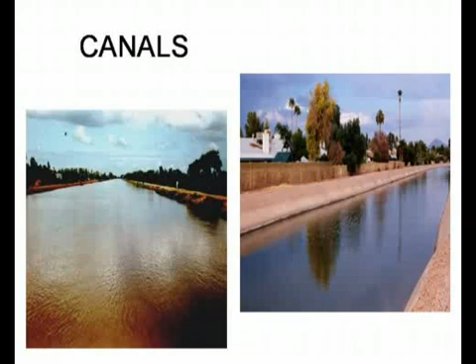Canals are man-made channels which carry water diverted from natural rivers. We use river water and transfer it to areas where there is no natural flow of water. Before diverting this water from rivers, we need to store it, and this water is stored in the form of dams, weirs, barrages, which are called diversion structures.

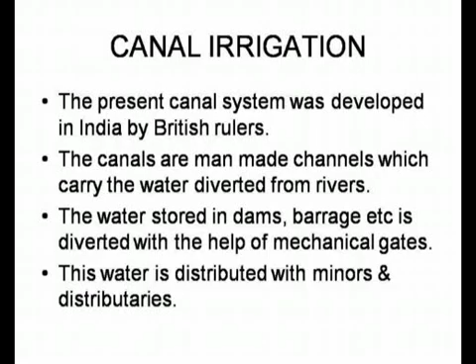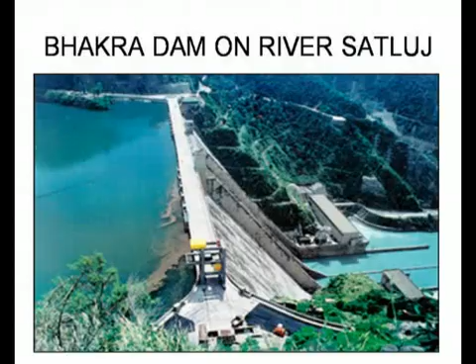There are mechanical gates which regulate the flow of water in canals. They can increase or decrease the flow depending on requirement, season, and cropping pattern. The water is further distributed from a canal by minors and distributaries, and the control of this water is with the local government, which decides how much water is distributed to which area. Therefore, canal water is a centralized form of irrigation controlled by government.

The canal water has certain advantages. First is quality of water. The water in canals comes from rivers, and rivers take their water from melting ice in Himalayan areas, or from catchment areas or big lakes. This water is sweet, non-polluted, and best for agriculture or human consumption.

The canals have transformed the agriculture economy of northern India, western India, and other parts where canals were built by the British and later by government. We all know that the Indira Gandhi Canal, which passes through Rajasthan, has transformed the life of people there, and it is the lifeline of millions of people living in that region.

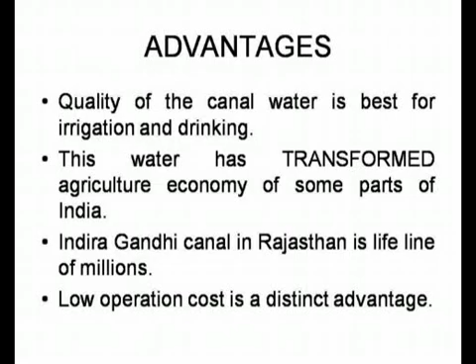The low cost of operation is a distinct advantage of the canal system in India, because water flows by gravity and does not require any form of energy for distribution. The diversion structures like dams can also be used for generating electricity, producing clean power without any pollution.

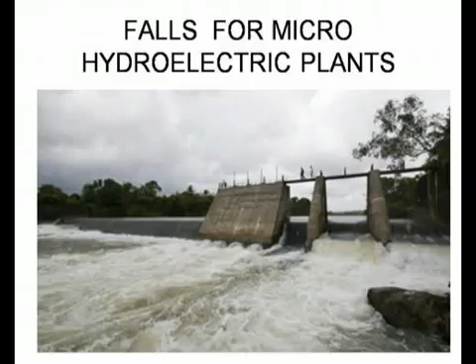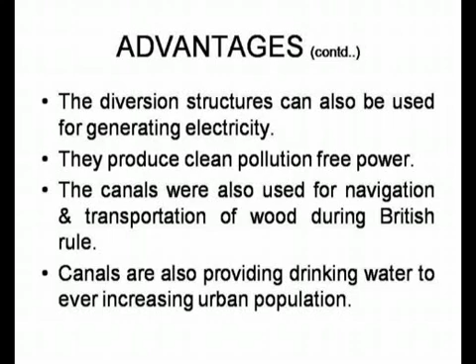The canals were also used for transportation of wood and navigation during the British period, but slowly after development of the road sector, this was not popularized and stopped. The canals are also providing drinking water to cities and urban populations nowadays.

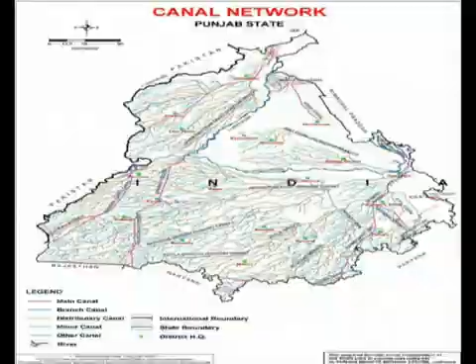Canal irrigation was very popular at one point, but it is declining due to various reasons. The construction of diversion structures and canals requires huge amounts of land, causing ecological and social concerns. Because of this, a lot of people are displaced during construction of dams, weirs, or barrages, and their resettlement is a very big problem.

Huge investment is required initially, and income is generated only in years to come. Dams constructed in earthquake-prone zones like the Himalayan area raise questions about their safety, since that region is a very sensitive area for earthquakes, falling in zone 5. So safety is a concern for the government and the people living downstream.

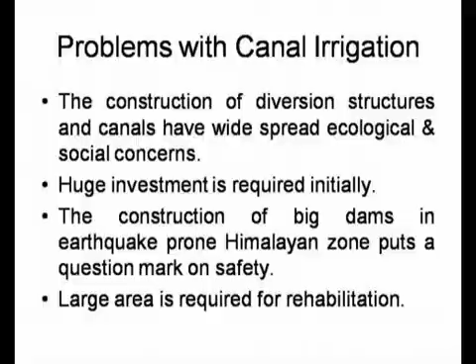Another important issue is land required for rehabilitation. When we construct big dams or other hydroelectric or water-retaining projects, we displace a lot of people, and they have to be rehabilitated, which requires more and more land.

Whenever there is excess rain in the catchment of rivers, there is a danger of flood, and the life of people living downstream is always in danger. Due to siltation in river beds and reduction in the life of reservoirs, flash floods are caused even with small rains, and this problem is increasing day by day.

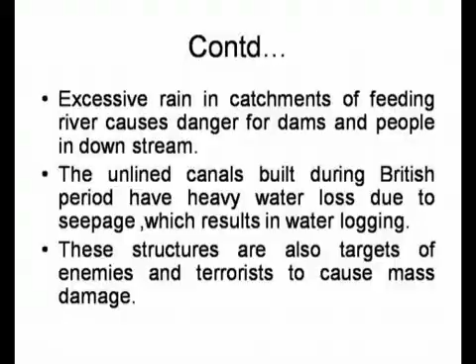The canals built during the British period were unlined, causing a lot of seepage of water into adjacent areas, wasting water and causing waterlogging. Structures like dams are always targets of enemies seeking mass destruction, and now they are targets of terrorists, so a lot of expense is required for the security of these structures.

Canals also reduce the quantity of water in naturally flowing rivers, thereby reducing the speed of water flow. This increases siltation, decreases river depth, and increases pollution. Effluents are not diluted due to less quantity of water, and aquatic life is also disturbed.

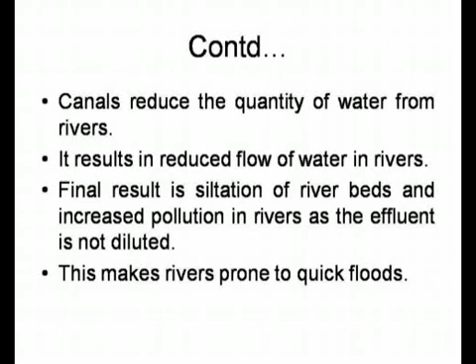The less depth of the rivers makes it prone to floods. Now we have to look forward. What should be our strategy in case of canals?

Despite several disadvantages which we have discussed earlier, there is no substitute at present for canals in areas where groundwater is not available or groundwater is not fit for agriculture or human consumption. Like Rajasthan, like some parts of Haryana, we have to use canal water, and there is no alternative. So we have to make some strategy for proper use of canal water.

First thing is maintenance of these diversion structures and canals have to be taken on war footing. The seepage from these areas, the leakage from the canals, all other problems have to be addressed by proper maintenance of these structures.

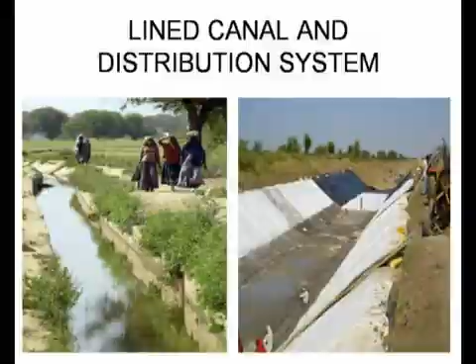Another thing is lining of the canal. Wherever canals are there, they have been constructed during the British period. Now we have to at least provide lining to them so that there is no loss of water from the unlined canal.

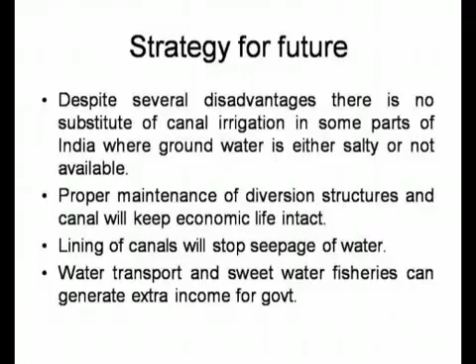For making the canals economically viable, we can develop water transport and we can develop sweet water fisheries in the canals so that we can get more revenue out of the canals, and this can be used for maintenance of canals and the reservoirs.

The falls are available at various places, and these falls can be used for establishing micro hydroelectric plants, and these micro hydel plants can supply electricity to the nearby villages on a standalone basis, or it can be used for other purposes like industry or anything else.

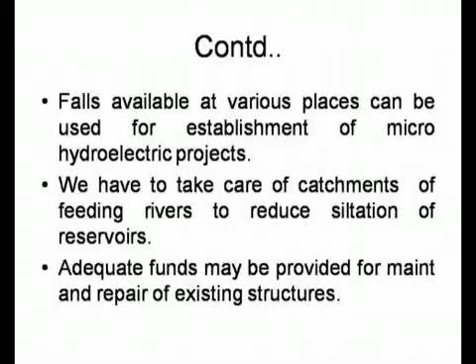The catchment area which is feeding water to the river will have to be treated by vegetation so that silt is not released into the water, reducing the economic life of the reservoir which is feeding to the canals and reducing the life of the reservoirs.

We require a lot of funds for maintenance and repair of existing structures, and these funds have to be provided for sustaining the canals which have already been constructed.

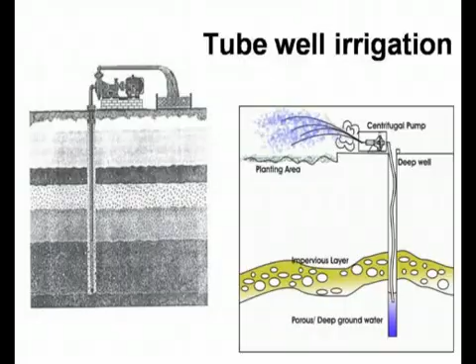After canals, there was a boom in the irrigation sector, and this boom was caused by tube well irrigation. In mid-70s, tube well irrigation was popularized in India after the Green Revolution. Before this Green Revolution and tube well irrigation, the main method of extracting groundwater was through wells only, and there was no other method.

Tube well irrigation means extracting water from the ground through mechanical means. We have to extract the water from the ground by employing pumps, and by employing pumps we get a lot of water quickly and with low investment cost.

Before the development of tube wells, the groundwater was extracted through traditional ways, which were rahats or dhinkli or other things, which were either driven by animals or using manpower.

Another thing about tube well irrigation is that it has revolutionized the entire irrigation sector because it has decentralized the ownership of irrigation structures. The canals were in the control of the government and bureaucrats, and supply of water was at their will. But now the owner of the irrigation structure is the farmer himself, and he can control the water when he requires it, how much he requires, and in what form he requires it. That is the biggest achievement of the tube well irrigation system.

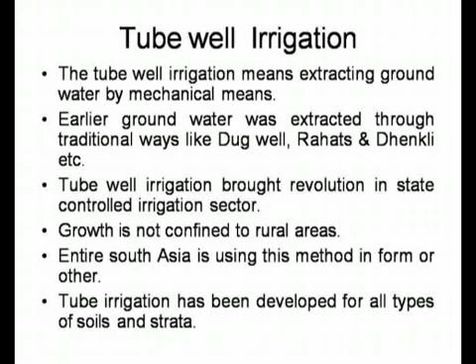And growth of this system is not confined to India. Entire South Asia is using this form of irrigation for development. The technology has been developed for every type of soil and every type of strata. Even hard rocks can be bored through mechanical rigs for construction of wells.

So this type of irrigation is being developed everywhere in India, and it has resulted in over 60% of the irrigated areas. Meaning 60% of the area is being irrigated through this tube well system. But the remote sensing data shows that it is actually 75%. It means our data in physical form is not complete. The actual irrigation through the tube well system is more than 75%.

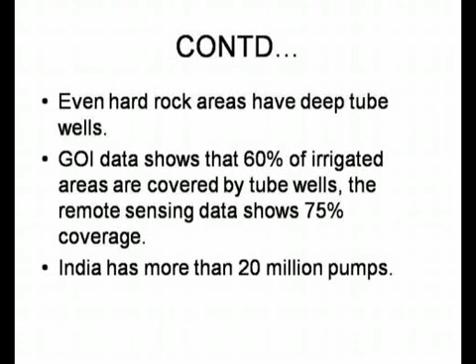And at present we have 20 million pumps. 20 million pumps require a lot of energy and a lot of maintenance. So a lot of manpower is also involved in this tube well irrigation sector.

Now we will discuss the benefits of the tube well system to farmers. The first benefit is low investment and low gestation period. The investment on a tube well is very low, ranging from 20,000 to 1 lakh, or in case of deep bore wells, a few lakhs. But we start getting water immediately after boring and installation of a pump set, with no gestation period.

The asset is controlled by the farmer or owner at his own will, with no interference from anybody. The irrigation is highly efficient, with very less loss of water due to evaporation, as the transportation length is very low.

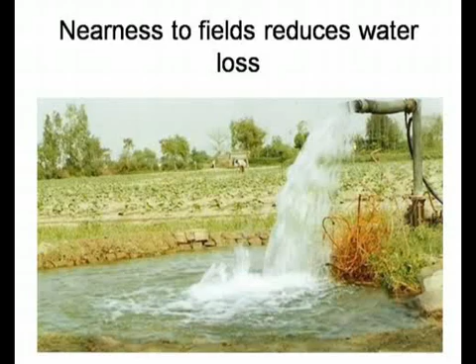The tube wells are situated near the farms, providing drought proofing for at least 1 or 2 monsoon seasons, since groundwater recharge requires monsoon rains. But at least for 1 or 2 seasons, we can survive with tube wells. Technology for drilling tube wells is very easy and available, and finance is also easily available, contributing to fast development of the tube well sector.

Next, it is the priority of successive governments. The development of tube well irrigation is a priority for all governments, whether central or state, and every government gives benefits to farmers using tube well irrigation. Banks are also financing these schemes individually and on a local area basis. Earlier, subsidies were also available for boring tube wells and allied activities.

Now it is not only beneficial to individual farmers, but tube well irrigation is beneficial to the nation. It has created much more potential and irrigated areas compared to what was created in 150 years by the government. The British rulers created canals, and up to the 1970s some canals were also built by the Government of India, but the total irrigation from these canals cannot match the potential created by tube wells in 25 to 30 years. The expenditure on canals and storage structures was very high and involved public funds.

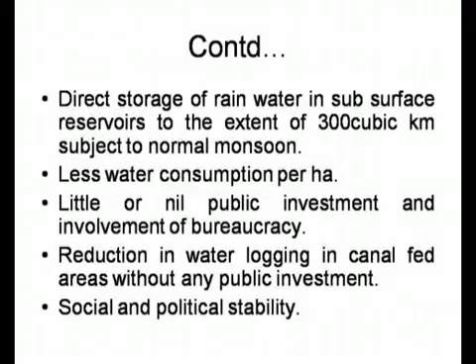First is wastage of water. We all know water is nature's gift and should not be wasted, and this sector has to be sustained for sustaining food production. If this sector grows without any control and greed is not substituted by need, the doomsday is very near. At every forum we are discussing the groundwater table, its depletion, the coming of salts along with water, and other harms of the boom in the tube well irrigation sector.

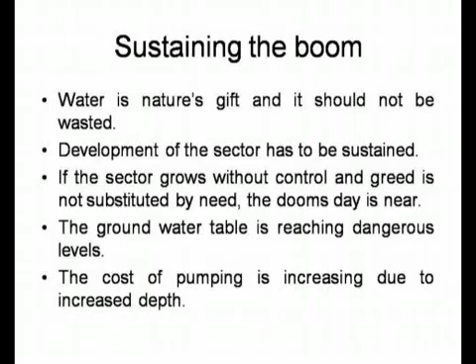The water table is reaching dangerous levels in some parts of India, in the western part like Punjab and Haryana, western Uttar Pradesh, which have already suffered, and in the southern part in Andhra Pradesh, Tamil Nadu, and Maharashtra, where this problem is increasing day by day.

Only the areas where tube well irrigation has not been developed are not suffering from this problem, like the eastern part of India. Due to decrease in the groundwater table, we have to increase the depth of the tube wells, and the cost of bringing water up to the farm is increasing due to the increased depth of the tube wells.

This requires more fuel, more energy, and efforts are wasted due to this. Pump sets which were earlier purchased by farmers have become redundant due to more horsepower needed now. So this problem is increasing day by day.

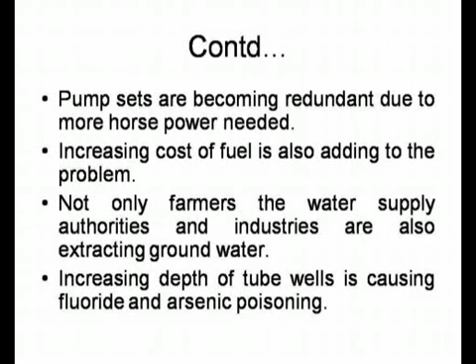Cost of fuel is also increasing. Fossil fuels like diesel are used for running tube wells, electricity is also used for running tube wells, and the cost of these two items is increasing every day.

The farmers are not the only persons extracting groundwater. Industrialists, urban water supply agencies, and government agencies are also drawing groundwater for their needs, and they are equally responsible for depletion of the groundwater table.

The increasing depth of the tube well is not only causing these problems, but it is also causing fluoride and arsenic poisoning. In some parts of India, the water is no longer fit for use because of the increased depth of the bore wells.

Pollutants used by people in industry or in farming are entering the groundwater and making water unfit for human consumption. The sector is still uncontrolled, and whichever controls are there, they are not effective.

So the sector has to be controlled, and some legislation is necessary for controlling the uncontrolled growth of this sector, and we have to sustain this boom of irrigation in the form of tube well irrigation.

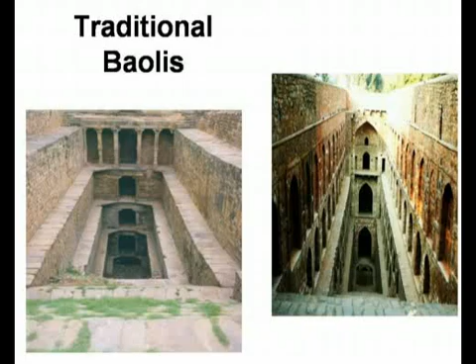The method for conserving rainwater is rainwater harvesting or groundwater recharge. Traditional knowledge is there, and we can see structures like Baolis, Kunds, Tal, Water Temple, Johad in various parts of India which were built by kings at that time and local people. These structures were used for conserving groundwater and recharging the groundwater.

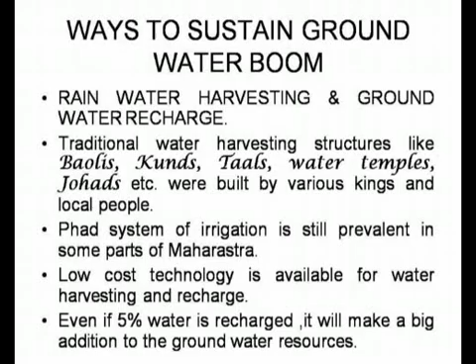The Phad system of irrigation is still prevalent in some parts of Maharashtra, which is based on conserving groundwater. Low cost technology is available in India traditionally for harvesting groundwater and recharging the groundwater.

The other method available to us is increasing irrigation efficiency. Increasing irrigation efficiency means irrigating more fields with the same amount of water. It means cutting water use in some form to deal with the problem.

Micro irrigation is one of the methods which can solve this problem. The only problem with micro irrigation is that it is capital intensive.

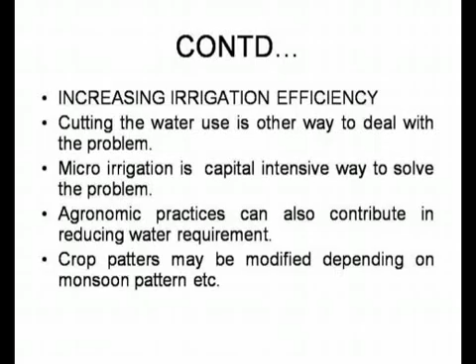Another thing we can use is agronomic practices, which can contribute to reducing water requirement. Crop patterns can be modified depending on the pattern of monsoon and depending on each area.

The other way to reduce the pollution of groundwater is organic farming. Organic farming can deal with contamination and pollution of the groundwater. We will deal with organic farming in another session in detail.

The other holistic way of dealing with this problem is the watershed approach. Watershed approach is a holistic approach to conserve all components of nature, be it rainwater, soil, or forest, and it involves community in most of its components.

Various studies done by various organizations have shown that the water table rise was noticed and productivity was increased wherever the watershed approach was followed, and conservation of soil and forest were also an integrated part of the watershed approach. Government funds are also available for implementation of the watershed approach, and this will be discussed in detail in another module in this course.

Another thing is energy. Energy is required for tube wells, and we presently use fossil fuels or electrical energy, but the cost is increasing. In order to sustain the boom of groundwater, we have to reduce this cost.

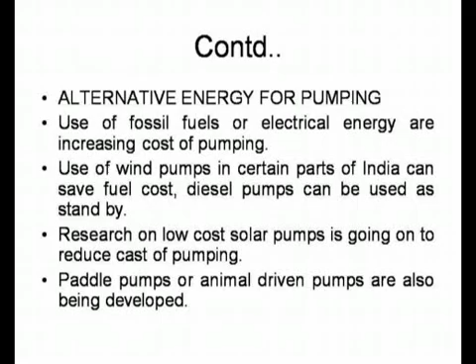Researches are going on for the use of wind pumps, pedal pumps, or other types of energy sources for reducing the cost of extracting groundwater. Solar pumps are also available, but their initial cost is very high.

Animal driven alternatives are being developed, and there is a lot of need for R&D in this sector. Considering all these things, we still feel that rainwater harvesting and groundwater recharge are the best low cost alternatives which will sustain the boom of this tube well irrigation. The expenditure will also be curtailed.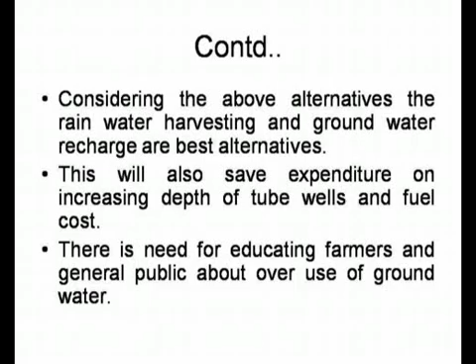The saving will be there in form of reduced depth of tube wells and reduced fuel cost. Though there is need for educating farmers and general public about use of groundwater so that they should not waste it.

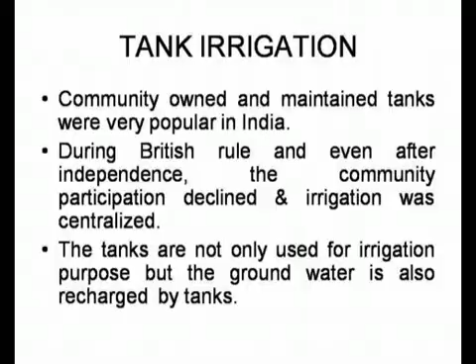Now we will discuss about another form of irrigation, that is tank irrigation. Tank irrigation was very popular before Britishers came to India, and community based tanks were constructed especially in South India, and they were used for irrigation and other purposes. During British period, the community participation was declined and irrigation was centralized and canals and other things were made.

The tanks are not only useful for irrigation, but they recharge the groundwater indirectly. So there is urgent need for rehabilitation of these tanks, especially in South India and in all other parts of India, with participation of the community, so that we can get benefit from tank irrigation and also use it for a structure for recharge of the groundwater.

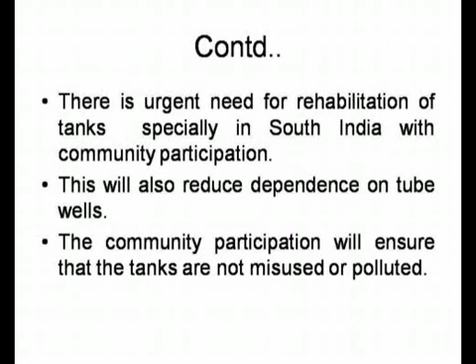The development of this sector will also reduce our dependence on tube well irrigation. Ultimately, it will reduce the consumption of energy. Community participation will ensure that the tanks are not misused or polluted by human activities like washing clothes or other activities near the tanks.

The most important and future of irrigation is micro irrigation, and we will discuss about micro irrigation now. Micro irrigation methods involve very high initial cost, but they save the precious water and pay back in form of saved water, saved power and increased productivity. So we have to popularize the micro irrigation at any cost.

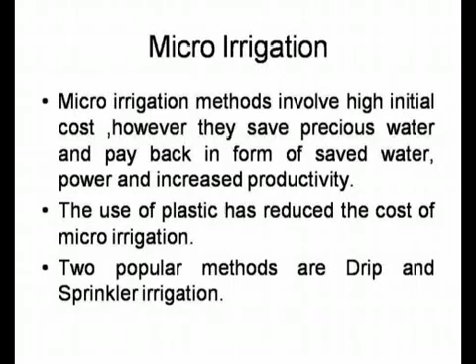Earlier the metals were used in manufacturing these implements, but now use of plastic has reduced the initial cost of the micro irrigation products. The two popular methods are drip and sprinkler irrigation. We will discuss about drip irrigation now.

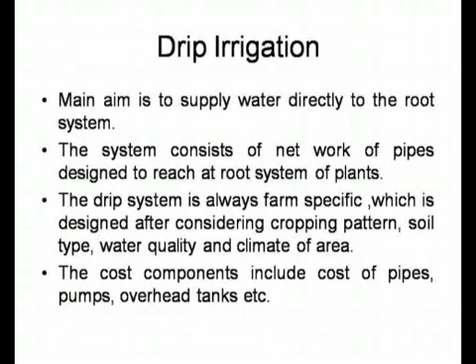The main aim of drip irrigation is to supply water directly to the root of the plant. It means there is no wastage of water in between and water is directly going to the root system. The system consists of network of pipes and it is designed to reach the root system of each and every plant. It means that system is not universal.

It has to be based on the requirement of the particular field, and it is a farm specific system. It means it has to be designed for each and every farm. The aspects which are considered at the time of designing drip irrigation is cropping pattern, the type of soil, the water quality available and climate of the area.

It means what will be the evaporation loss and what will be the average rain, so that we can calculate the requirement of water by drip irrigation. The cost components are cost of pipes, cost of pumps and cost of overhead tank for storing water.

The drip irrigation saves lot of labor. It saves most of the water wasted due to evaporation and transportation, and it also reduces the fertilizer cost. It prevents the waterlogging in the fields.

It is very useful in the case of growing vegetables and fruit crops because the water is supplied directly to the root system. The productivity increases to the extent of 30 to 75% in case of such crops. The various state governments are offering subsidy for establishment of drip units. So farmers have to take advantage of drip irrigation because it will result in decreased cost and increased productivity.